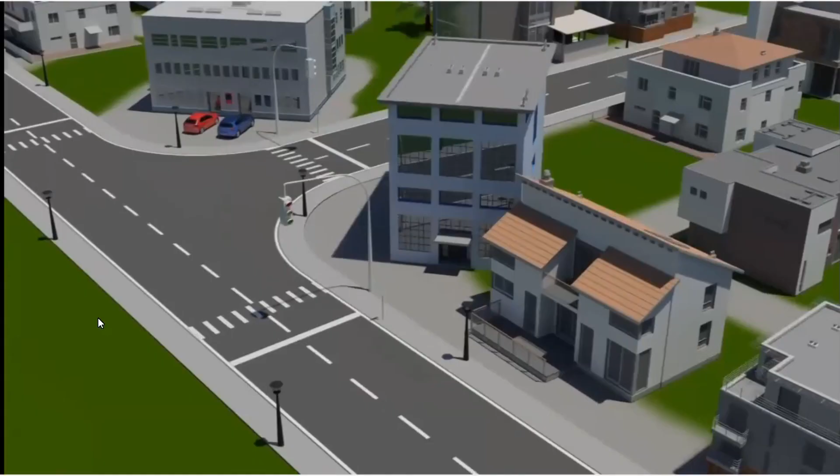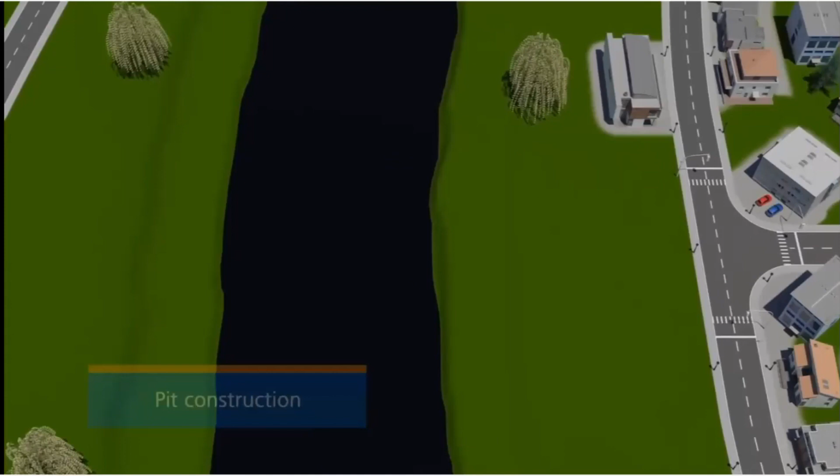Sure. So this is a typical application. It might be a siphon, sewer siphon, for example, going underneath the river, and you're going to typically have multiple 30-degree bends to have that line traverse underneath the river. And so you're seeing sort of a three-dimensional cutaway of what that looks like.

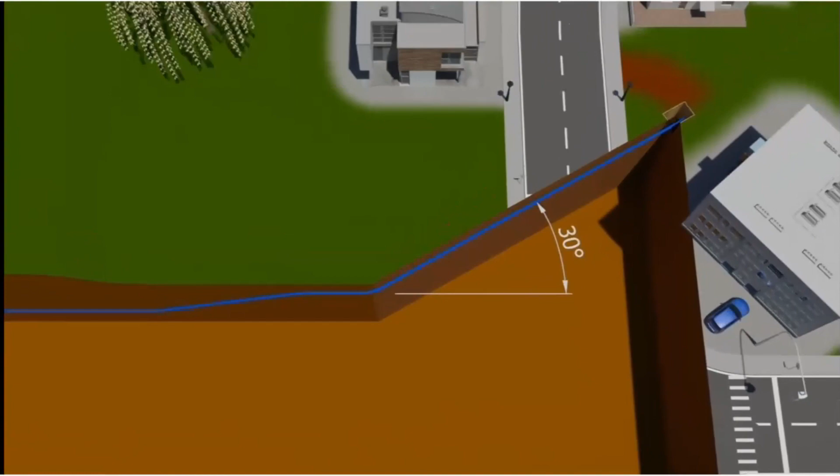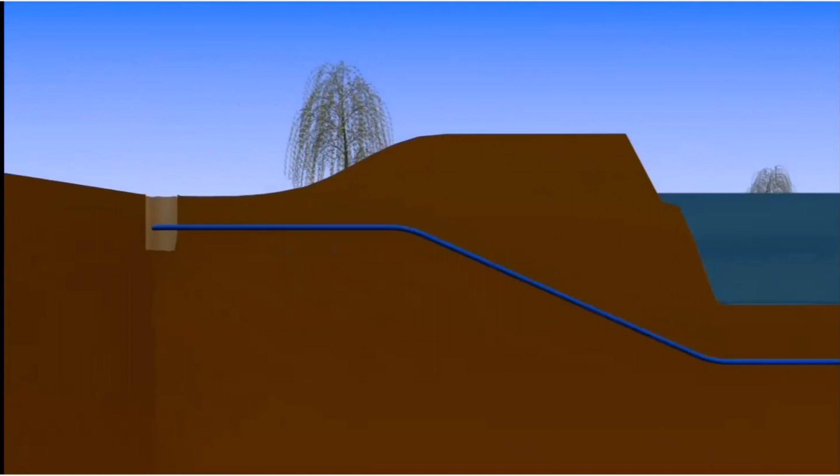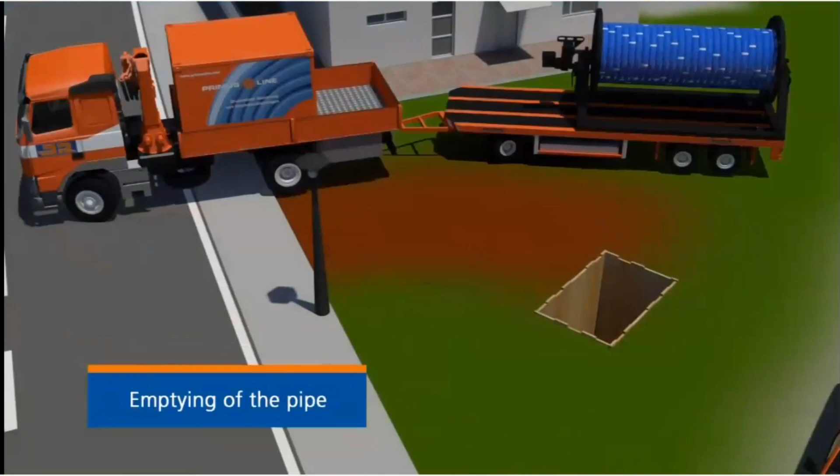So you've got a 30-degree bend coming up to the line. So you have vertical and horizontal bends. So a real challenge for a lot of other slip lining technologies. And again, that's the benefit of having a flexible liner like Primus Line. So we come to the job site. You see the spool that's on there. We've prepped the job site. We've cut into the host pipe.

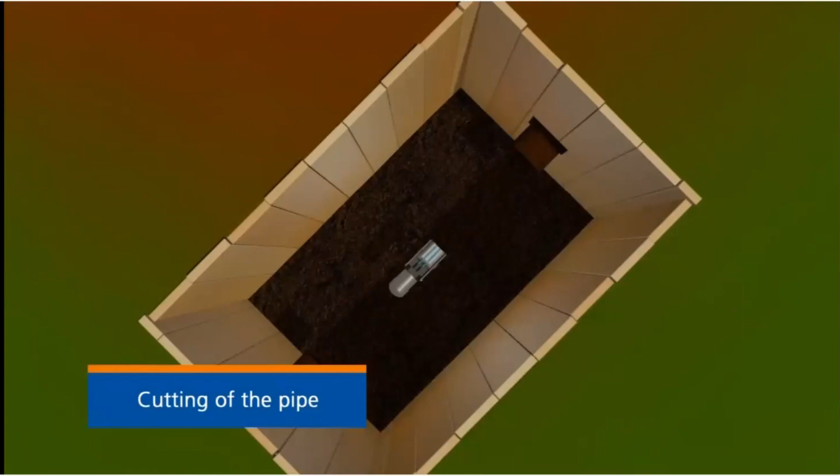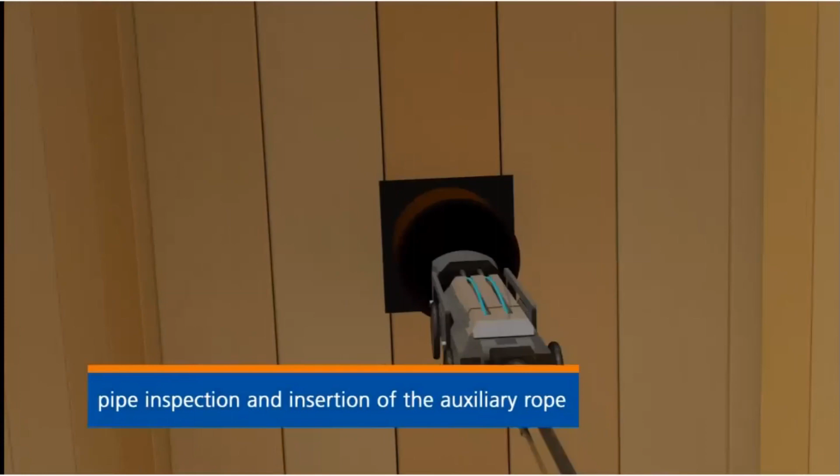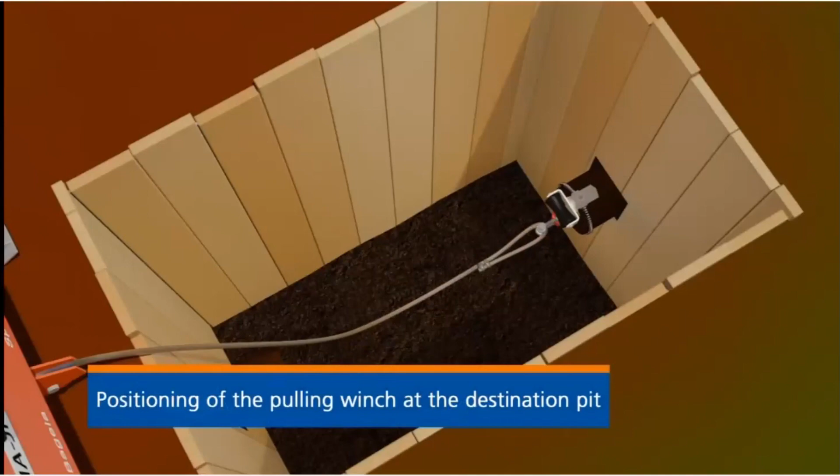Our footprint, as mentioned, is much smaller than other conventional slip lining technologies, because our liner can be pulled in, inserted at a 90-degree bend. When we pull out at the target pit on the other side, we typically like to be between 0 and 10 degrees. So that might be a little bit elongated, but typically we need about 5 feet of actual workspace inside the pit between the end cuts of the host pipe.

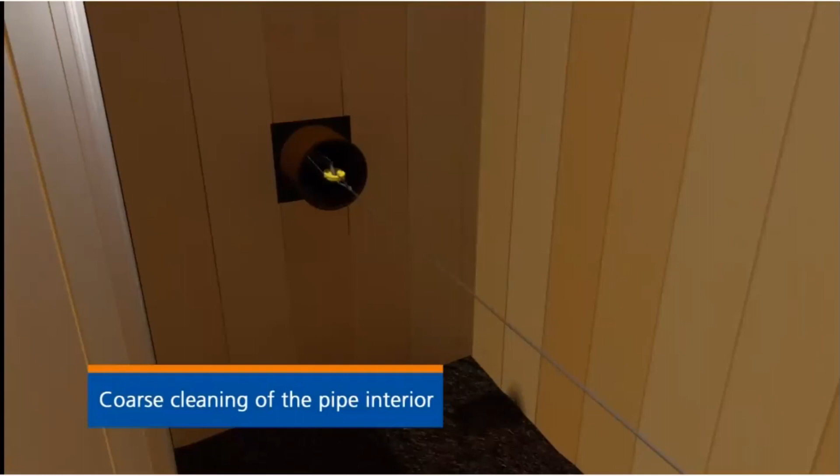So then you're going to need 2 feet beyond that. So you're talking about a 9-foot by about 4-foot wide pit, typically, is what you see for our access pits. So the liner is pulled in. We're going to do a CCTV inspection to establish the condition of the host pipe. Then you're going to do the cleaning.

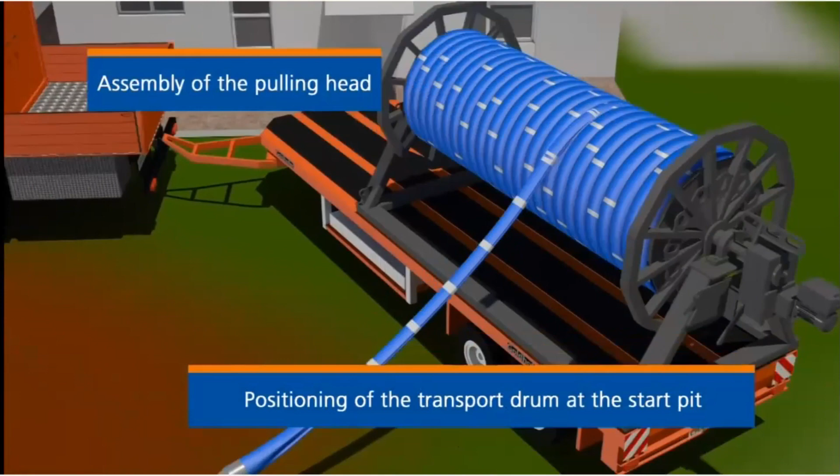And for cast iron pipes, which makes up a good majority of the pipe here, that's ductile or cast, it's going to be cleaned with a scraper, and we put squeegees in behind that. Most people in the industry are familiar with that. You don't have to do it that way. You can jet the line or pig the line. There's a lot of different ways to accomplish it.

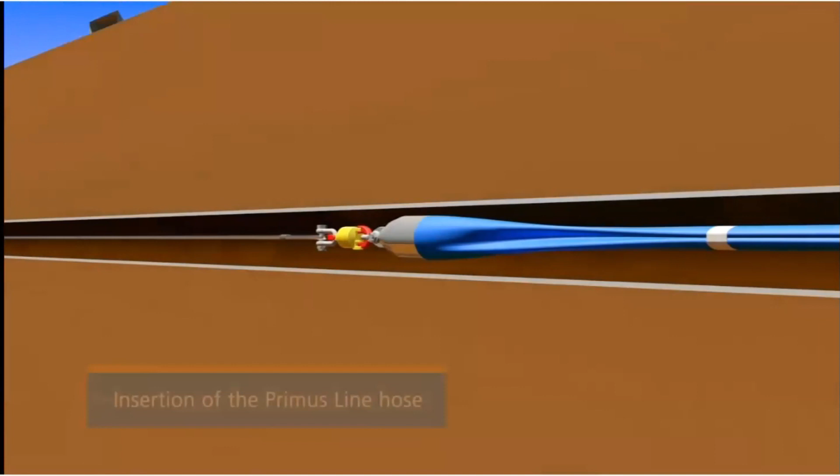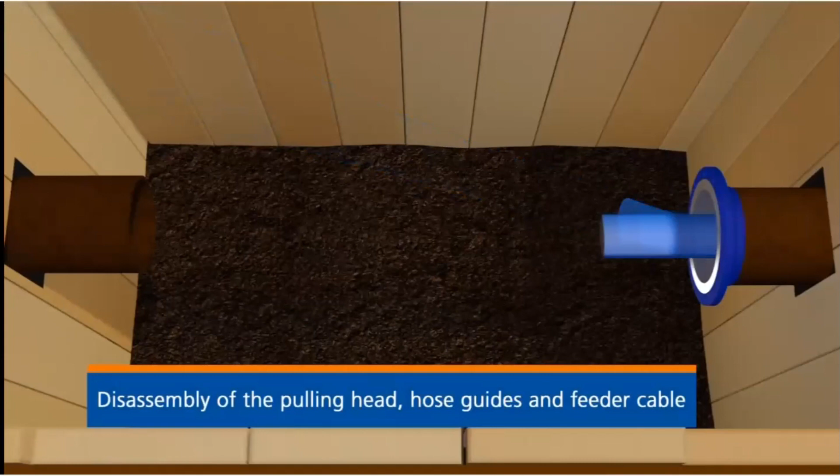Our requirement means that for the cleaning, the host pipe doesn't have to be perfectly clean. We're not getting down to bare metal. Our main concern is that there's nothing in the line that can damage the liner as we're pulling it in. And you see we use a pulling head there. You aren't always required to have a pulling head.

Sometimes just a steel rope. So you're seeing there the insertion of the pigs to inflate the line. The line's been inflated. It goes back to that round shape, and you're putting on the connectors.

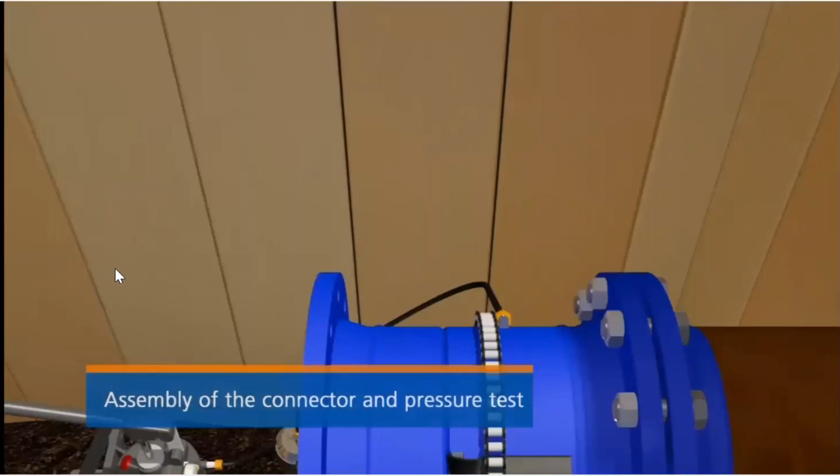And at this point, I'm going to pause it right here. So why we call it a connector is you can see that the host pipe has a flange placed on there, and it's typically a 150 ANSI flange. So it's a standard flange using a multi-joint adapter. You can accomplish that, or you can weld a flange on there. But whatever the case may be, we're going to bolt up to that flange with our connector.

So you have the outer sleeve, which is this portion right here in white, and then this blue flange bolts back to the host pipe. The liner is then pulled in, we re-round it. So with Kevlar, which has about 5 times greater tensile property than steel, it can only get to that roundest OD that we advertise, and it simply can't go anymore. There's no saturation of that line.

So it's our liner. I don't want to confuse it with other technologies that might be out there and act like a bladder, for example, and will expand to the host pipe. We're not tight fit. We're intentionally undersized. We want to stand off of the host pipe, so we're not transferring any energy back to the host pipe, whether it's water hammer, whether it's any of these dynamic forces or movement.

If you're on a bridge, your host pipe is going to be subjected to axial forces, longitudinal forces. All these things aren't going to affect our liner. We can accommodate them very easily and do all the time. So in fact, there's applications in Italy, for example, they use our liner specifically for seismic upgrading of existing lines. And that was in Trenchless Technology a couple of years ago, a big article on that, interesting. And that's on our website. So seismic upgrading is a huge application for us.

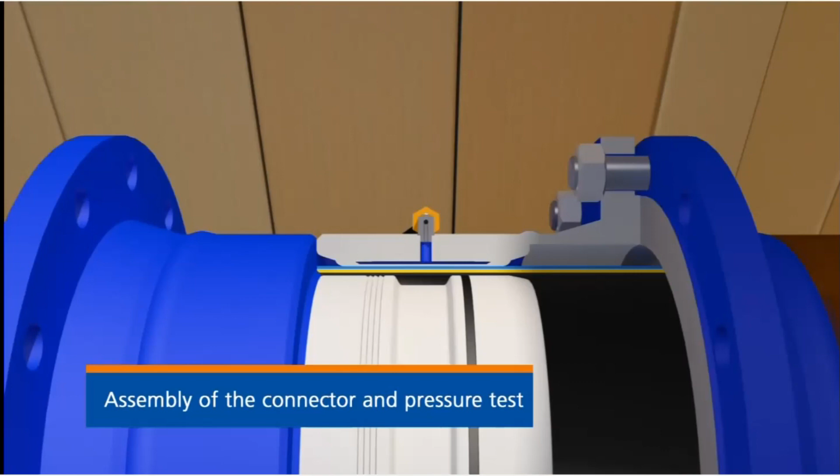And what's going to happen is it's going to crimp the liner in between and seal it in between the core and the sleeve. And then it's going to cure in 6 hours. In 6 hours, once it's cured, it's ready for pressure. And that's good for about 1,000 PSI. I mean, that's never going to fail, and it's never going to come off. It was designed for gas applications.

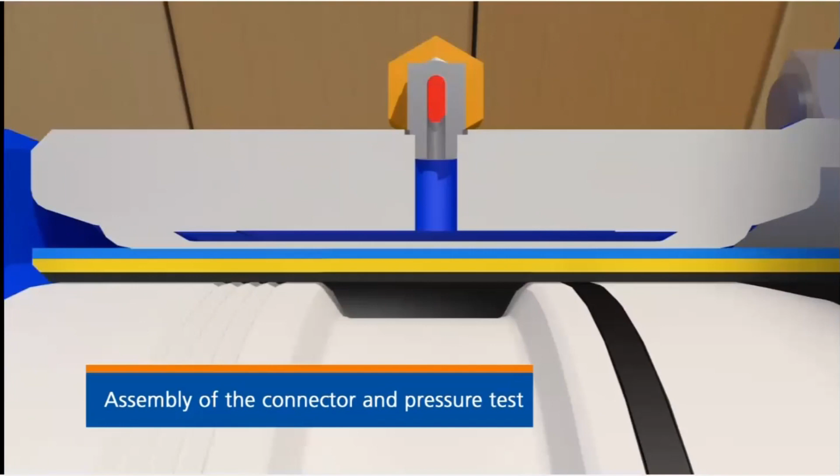So as you can see, we're using that high pressure pump to inject the epoxy. That epoxy is pushed in under over 1,200 PSI. So it's actually deforming the metal, reshaping it, crimping it. So that is now ready to go after 6 hours. That can be pressure tested and put back in service.

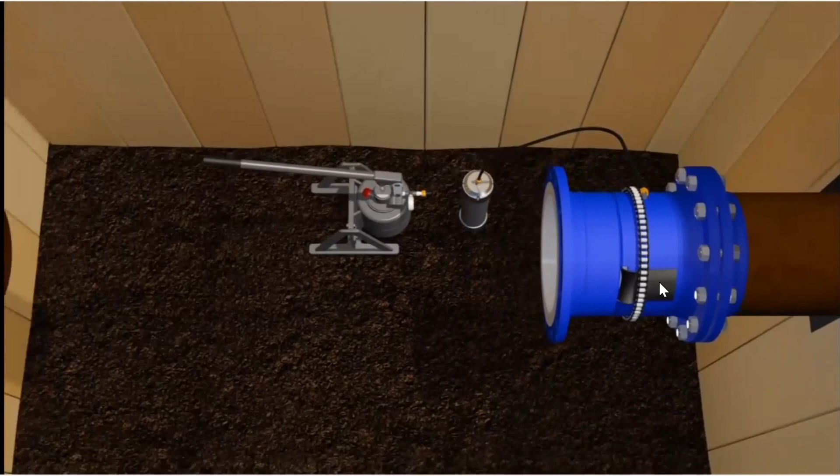Once that's done, you're ready to put your spool piece. You've done your hydrostatic test. You've done all your testing. You've passed your test, and for this, you don't have to worry about bacteria, but you're going to put that back into service and it'll be operational in 6 hours.

So in certain instances, like on sewer force mains, you have air release valves at the high points, right? So what we'll do is we can actually pull, and usually sewer force mains tend to be longer runs. So we can pull up to 8,000 feet of liner in at one time. Typically, when you have the high points of the sewer force mains, we have the air release valves.

When you're rehabbing the lines, it's been pretty typical in my experience that they'll replace the air release valves and put in new ones anyhow. So we'll take those air release valves out, remove them from the equation, and then we'll just pull straight through that section. Then we cut back our liner and put those end connectors on, because anywhere you terminate our liner, you have to use that type of end connector.

Understood. So as far as diameter of lines, obviously you can go long runs. It almost sounds like it's unlimited. How about the diameter of the line itself? So we're in a range of 6-inch up to 20-inch. Now, when you get to larger diameter sewer force mains, it is possible. We have done it all over the world. We've done it in the U.S. now. So we've done multiple lines in a single line.